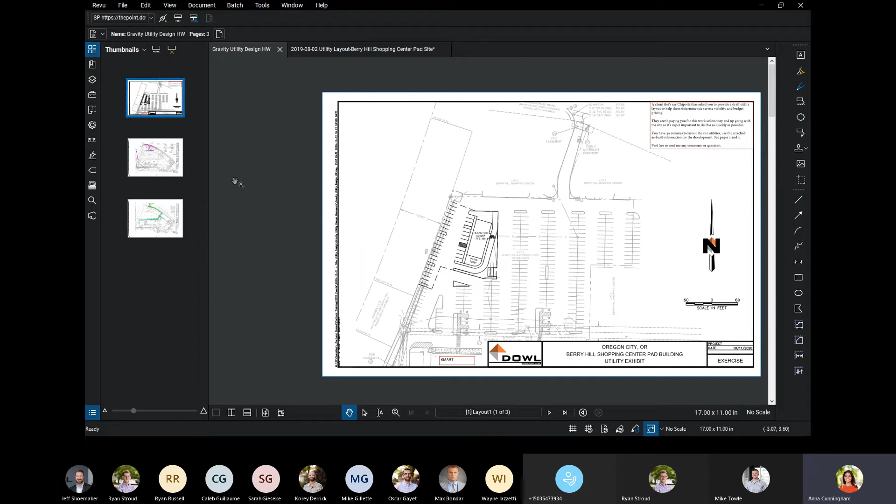In this case, I'll actually pull this up because I think some people might not have had a chance to look at it. So essentially we have this pad site. To the south is a Kmart, and we have as-builts for the Kmart project. This is that same road, so we know these are the storm pipes, and then we know we have sanitary and water.

But then the question becomes, where do you lay this stuff out? So back to the questions - is there city mapping? Sometimes when you're going completely blind in these scenarios, you don't have survey, you don't have as-builts - can you go on Portland Maps or whichever city's GIS system and try to pull that data, or at least be able to draft it in based on an aerial?

And then the last question, and I think Oscar you kind of started getting to that - actually I think there's one more: what does the tenant need? What is the use? If it's a restaurant, is that going to need something different than an industrial building? And the industrial building often has loading docks. So just those questions of what do we need to consider as far as sanitary, storm, water.

Although water's not a gravity utility, but anyway. And then what do restaurants typically need - loading docks? What does the future use require? That's one thing too, like for example the Portland Meadows jobs, they always have a provision for future use. They have this spec industrial building, and they'll say, well, we actually want to be able to provide sanitary to all four corners of the building, which is typical, but they're a bit more intense about it, because what if someday every corner develops an office? So it's good to know those things, but sometimes we don't know them from day one.

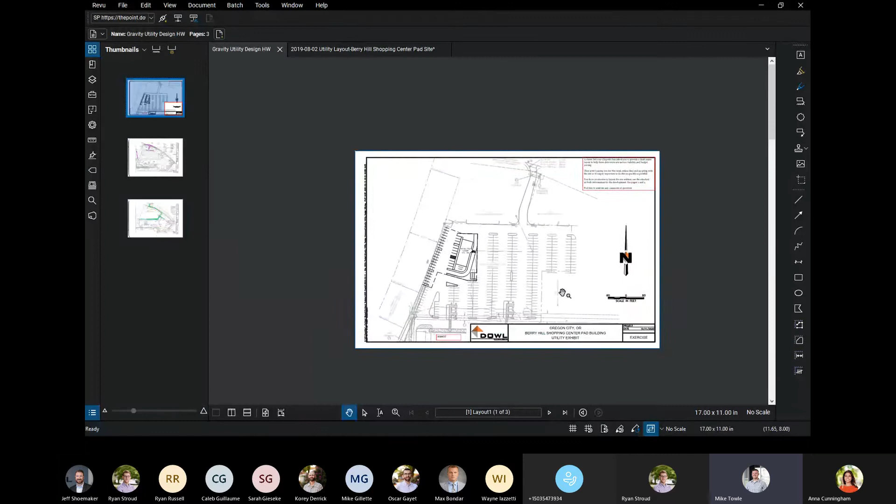I just wanted to, real quick before we jump into this, go over a little bit about the conceptual plan. Anna, if you were going to go back to those, feel free to stop me. A couple things, I don't know that we necessarily went over anyone's actual layouts, but in this case we had some existing contours.

Any thoughts on, if you don't have contours, what impact does that have on our potential conceptual utility layout? If we've got a site where we know we've got sewer and storm, we were able to find some GIS maps that show location but not necessarily grade. One of the things we need to be looking at is figuring out high points and low points on the site, not catch basin locations or things like that, but the general flow of the site.

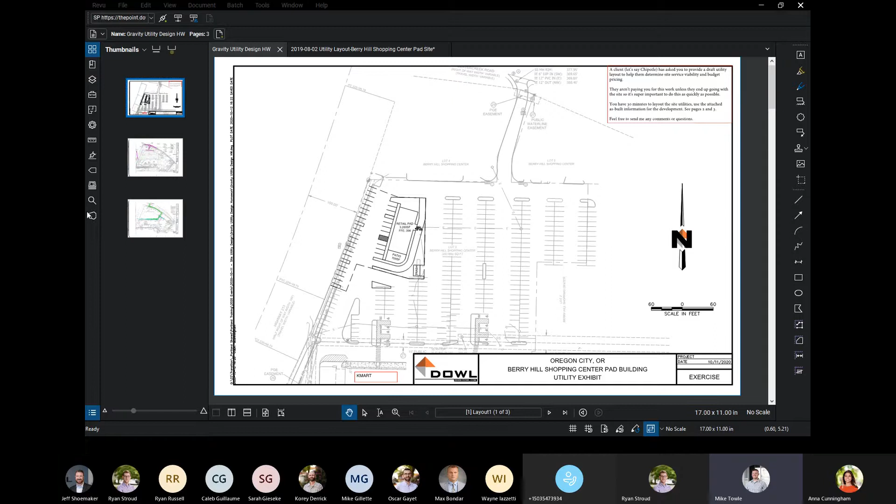There was storm and sewer on this site. If you look at those as-built, that was probably closer than where you potentially found, depending on how detailed you got, to where we may have ended up tying in. And if you don't do a preliminary look at, even just Google Earth, the flow direction of the site, we could be showing something that is likely not feasible because of depth of utilities.

Especially if we don't know the depth of existing sewer or storm - water doesn't really matter because it's not gravity - but if we don't know the depth of sewer and storm, we need to do some background on where the sewer is likely deep enough, or where the storm is likely deep enough. And if we're providing a conceptual utility plan to a client, if we don't know that information, we need to point out where it's coming from or what our assumptions were.

Because what we don't want to do is give them something, they take it as working, and then we get survey and we're not even close - that we have to run a sewer line 400 feet down the street to get depth on our line, or something like that. So we need to be making good assumptions on where we think the depth of sewer is, where the natural drainage pattern is, and whether it's likely we're going to have depth to actually tie in.

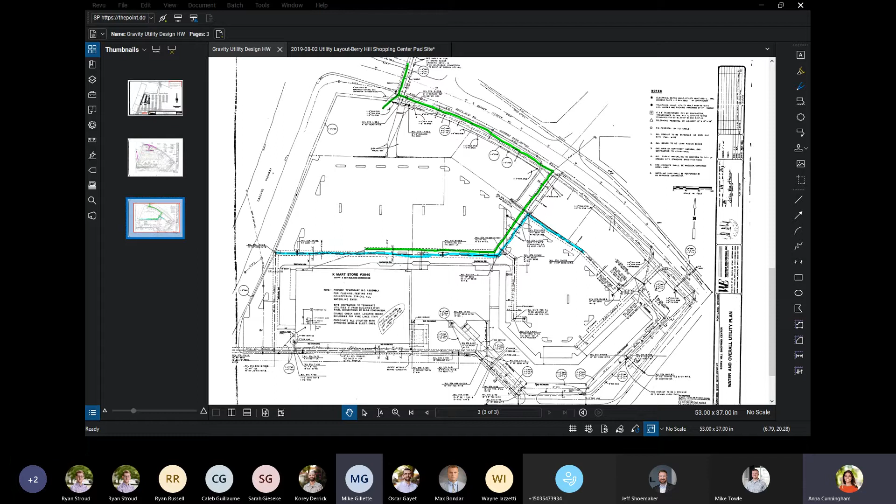Well, actually, I think Mike stopped me at a good point, because before I dive too far into what we should be doing, let's see what people did from the beginning. I saw Mike doing the homework. Mike Gillette, I'm going to put you on the spot. Do you want to go over your homework? I can bring it up and you can walk through your thoughts of how you set things. Is that okay? Yeah, okay.

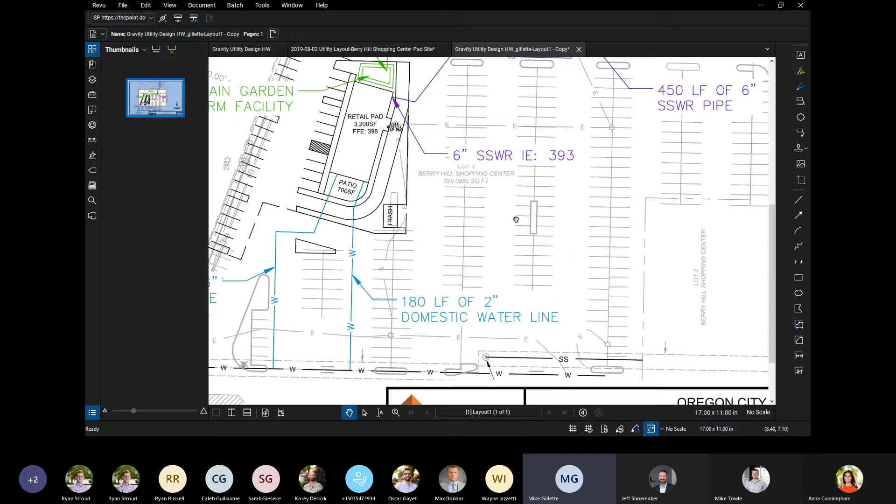So I started by looking first at where the storm and sanitary connections would be. The first one I looked at was closer to the site on the south, but quickly realized we had a finished floor on the building, and I remember that sanitary line was basically right at finished floor, so it wasn't a good candidate for tying into. So then I saw on the north side that one is like 30 feet lower, so figured that's where my sanitary connection would go.

Then the next thing was looking at those storm catch basins there, and there wasn't any line work on them, but they had the elevations listed on the side there. So basically I confirmed on the storm network what that elevation was, and just did a rough check of where that crossing would be for the sanitary.

And then I looked at the storm connection to our building, and also using the as-built, you could see from the existing grades that the whole site kind of just sheds north and then goes down the hill, down that road to Beaver Creek Road. So I just threw a little rain garden facility, drew it in on the low side of the building, and then had my storm pipe out and connected to that line in the access road there.

I said to throw a new manhole into that connection, and everything kind of just sheds way off to the north, so I'm not too concerned about crossing conflicts, since it's not a huge site and we have a lot of grade to work with.

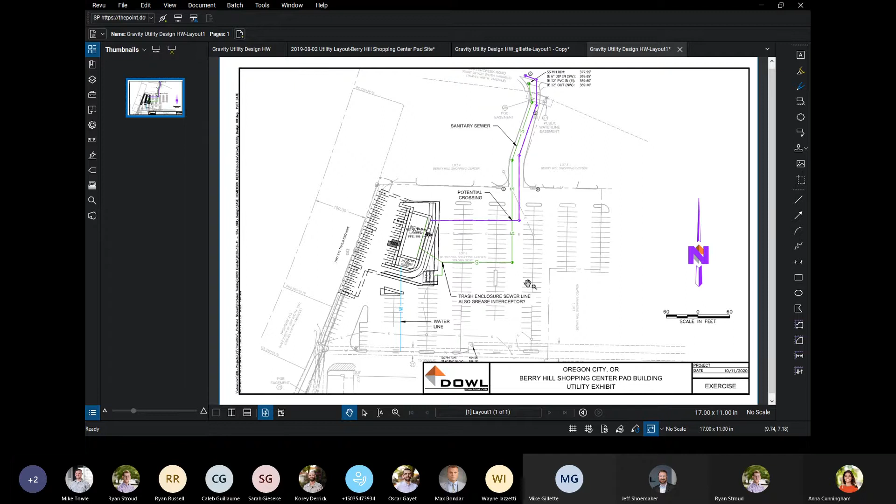And then for the storm, I looked at where the storm was and looked at the catch basins, and I just mocked in a rough version of where I thought it would be.

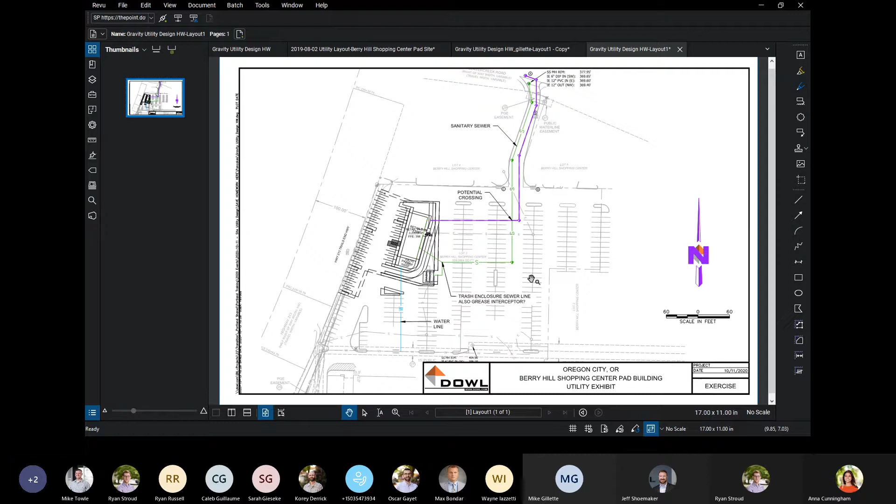I crossed there, but I didn't really know exactly where we wanted to connect. I was moving fast through this, so I didn't check all the stuff and make the calculations. Probably in retrospect that's usually a better idea, but I was just trying to get a fast layout that was decent and showed something.

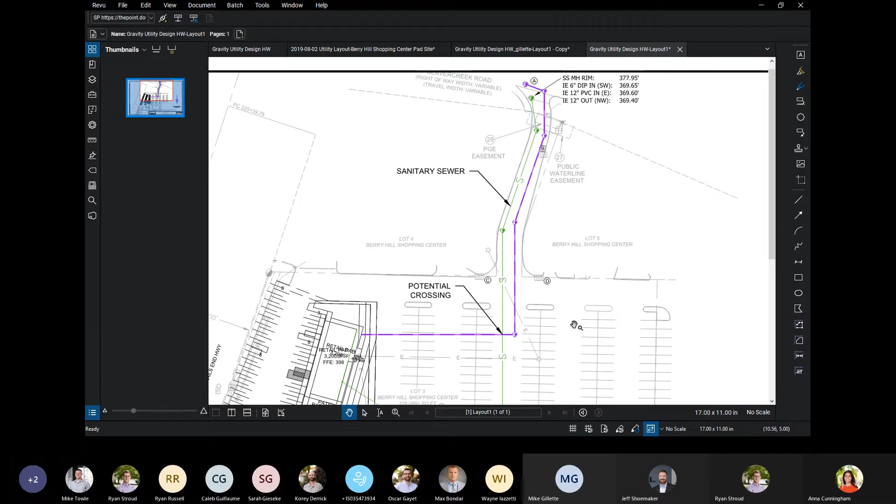And of course I mislabeled stuff. Actually no, I labeled stuff right. The reason I knew we were connecting up here is because the elevations were below the finished floor, and I know we're draining to the north on this site, at least with our gravity-based storm network. So I mocked those in there.

And then I knew we needed water, and I didn't want to have that undone, so I just threw a water line going in from that public water easement and into that thing. I didn't really look a lot about placement with all the stuff in the parking lot - that's where I probably could have done better, but I was trying to mock up something quickly so we could show something. Does that make sense to everyone?

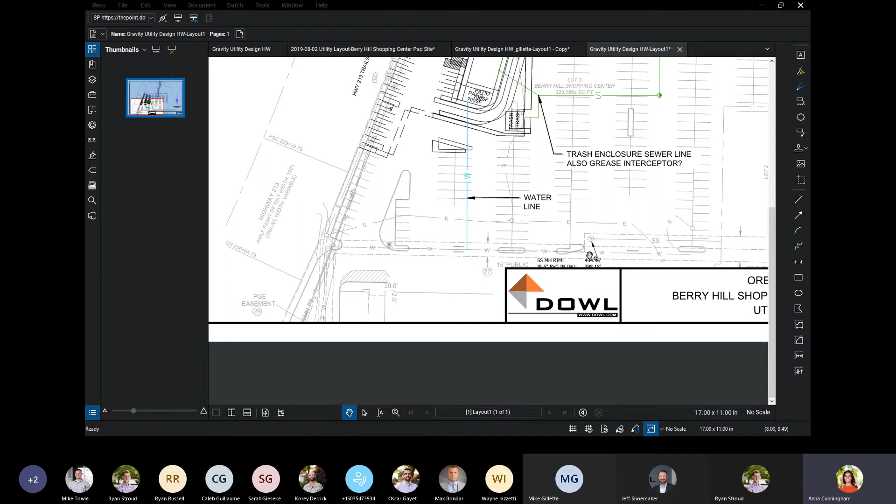I think it was good to think about the grease interceptor - that was one of our talking points for this. And I think the storm treatment was a really good add as well, just because where your site's going to be plays into where you put all your other things.

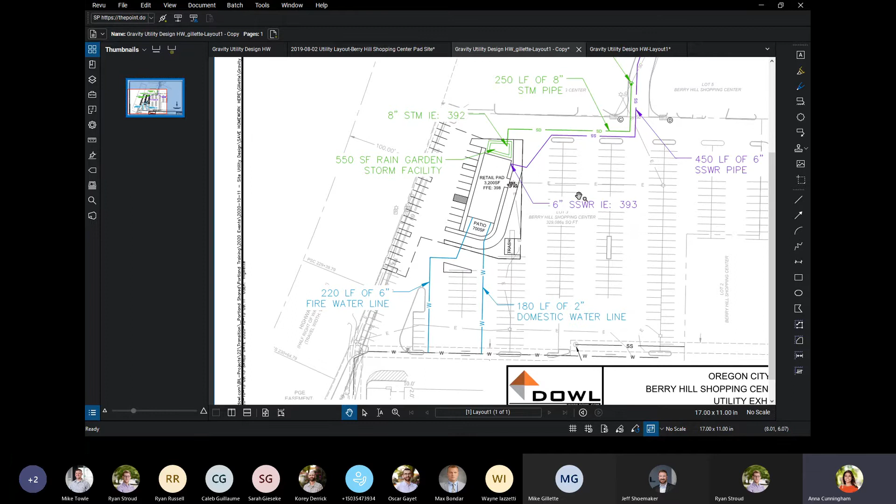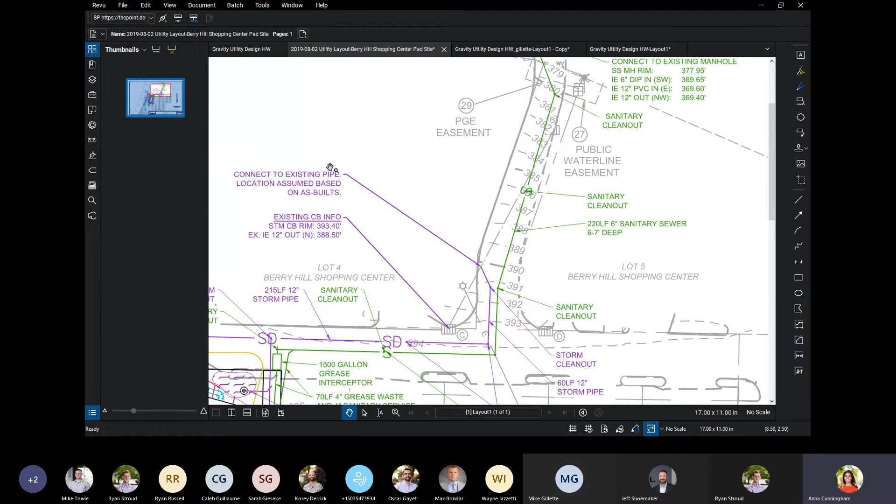One of the things I wanted to touch on with this layout - here's what the final looked like. It's a little busier, but this is what Mike showed where he made the assumption that there's a pipe here. This is kind of what Mike or Jeff talked about, that we need to make sure we clarify what we're assuming. So we're saying we're connecting to this existing pipe, but the location is assumed based on as-builts. And then storm pipe coming here - we just threw in some catch basins and some treatment areas.

And then for the sanitary, I guess the first question, and this goes to what we're going to go through in the PowerPoint, is how do you set your invert out of the building for sanitary? Anybody want to answer that one?

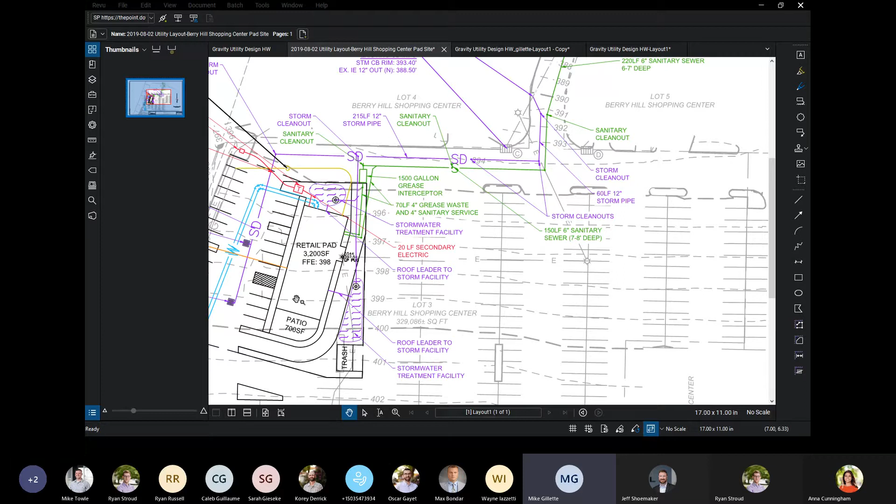Rule of thumb - I just set mine 5 feet below the finished floor. Is that just a frost depth calculation, or generally what we end up doing? I think that's what I saw on a recent project, and I've also been told at one point that it comes out from the slab like 3 feet down or so. Maybe 6 feet is probably where you want to be, generally speaking. If you have a bigger building you might want to do some calcs on lay lengths, but 6 feet for a quick estimate is pretty solid.

So what Korey's talking about with the lay lengths for sanitary sewer - we typically, I don't know if it's 2% or 1%, but I think 2% is more conservative, especially in a smaller building with smaller pipe, they need to run per plumbing code 2% across the building. So what I'm saying is you measure the building, get from the furthest corner to where you're going to be serving it, run that distance and multiply it by the slope of the pipe to get the minimum amount, and then you have to drop it. I usually drop it 1.5 or 2 to account for a floor drain and it running all the way across the building. Is that how you guys would typically do that?

I would always account for 2%. Bingo - building plumbers do not like going under 2% when they're dealing with their design. So always assume 2%, and like Anna said, from your tie-in, go straight to the back wall and then over to the furthest point on the building, and that will generally get you a depth that you know at any point on the building that they can tie into.

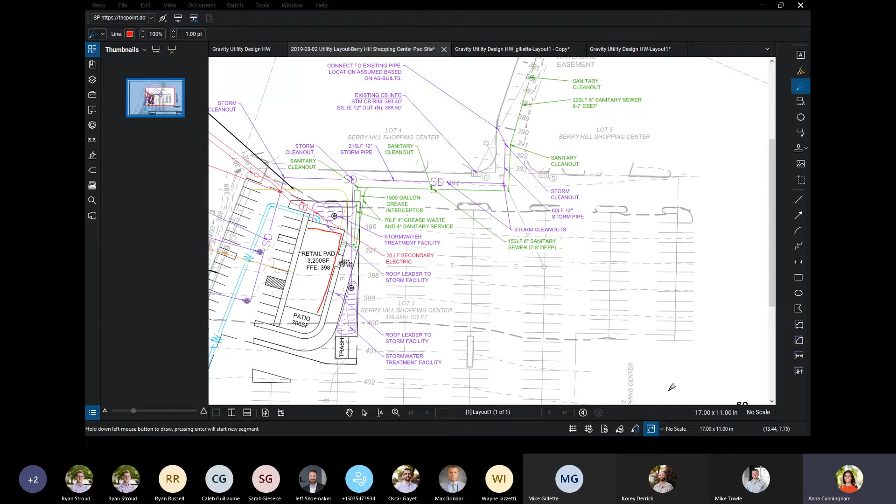So I'll hop over back to the PowerPoint and we can kind of go through. We talked about invert at the building.

Another thing that's interesting - I don't know that they're necessarily different, because now talking to Mike I feel like I'm all wrong about what I know - but matching inverts, matching spring line, or the center line of the pipe. Typically in a manhole for sanitary sewer, we're going to have a drop. The thing that throws me off a little about sanitary, or something I don't think about a lot, is matching crowns, because we don't often upsize in sanitary sewer. We're usually just running one size the whole way.

But then one of the notes is that when we connect, Mike does this typical note on his sheets, but when we connect to a main line and we use a saddle, the question to you is: where do we match when we use a saddle? Anybody want to answer that one for sanitary sewer?

It's only 3 choices. We have crown, we have spring line or center line, and we have invert. Spring line - nice, great job.

So then another question, and this kind of varies by location, is when are drop manholes required in your guys' experience? When have you seen them? Anybody? I don't know what a drop manhole is.

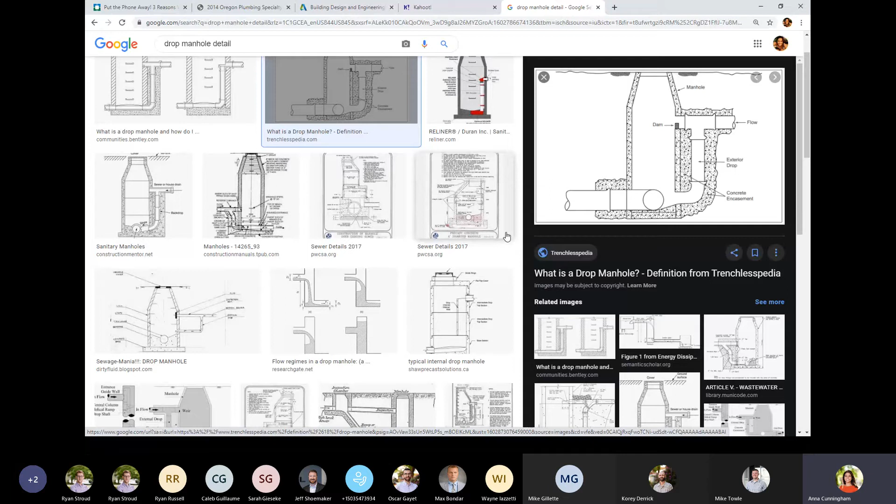Does somebody want to walk through this? I don't think I'm going to explain this well. Anybody? Korey, do you want to explain drop manholes? I don't think I can actually explain it. I just know you need them if you drop more than 2 feet.

Well, the idea - and I could be wrong on this - I believe the idea is simply that if you ever need to go maintain these, you don't want to be in there with sanitary 3, 4, 5 feet above the invert. So you're better off having some sort of structure on the inside or outside that drops that invert down and ties in at what it should be. You also get less splash and that type of effect.

Nice, I think that - hey Anna. Yeah, it's Max. My understanding of the drop manhole is if you have stuff dropping from a distance, say 4 feet, it actually starts to pile up and creates a barrier to the flow. So if it's solids, that's why you want to keep it flowing in a straight line rather than letting it pile up and create a clog. So I think that was the explanation I've heard about drop manholes.

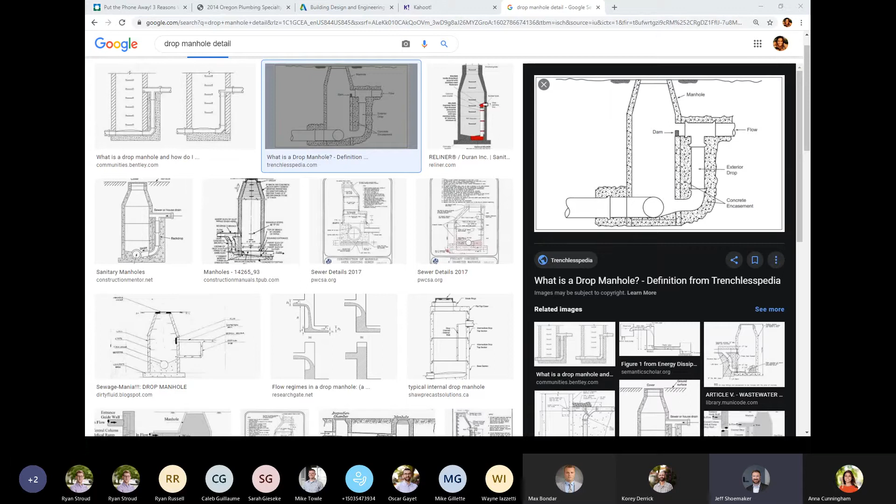I'll agree with that too. Both of those are right. And I'm curious if anybody - I'm looking at these details - I've never done an external drop. I've only done the internal. Yeah, it's interesting, I had never even - I've only done the internal.

So the thing you need to keep in mind if you're doing an internal is that it might require you to upsize the manhole from 48 to a 60. Okay, yeah, cool, the other thing - learned something.

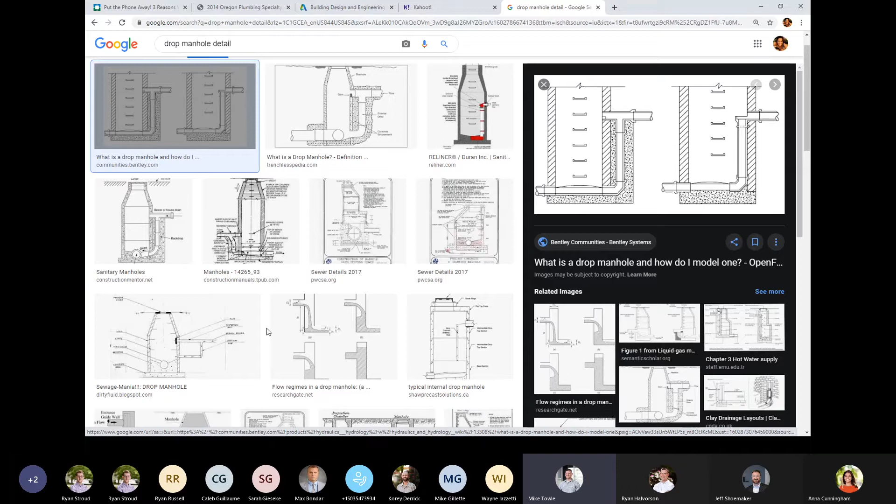One thing too, guys, is that on an exterior drop, a lot of jurisdictions are not allowing that now, or it takes approval to do that. I've run into that a couple of times here where the thought was to do an exterior, but we ended up doing an interior. Okay, cool.

So how about grease interceptors? I think Cakes talked about the grease interceptor on the exhibit. Since it's a restaurant, the waste from the kitchen area is obviously going to have more grease. So you need, pretty much they're always required for restaurants, a grease interceptor for a separate grease line that comes out of the building and then joins up with the main line that ties into the system. And then you have a separate waste out for the actual sanitary service for your toilets and stuff.

So as far as grease interceptor sizing, how in the past have you guys sized grease interceptors? Typically, this is Max. Typically, you get a letter from whatever business, say Chipotle or Starbucks, and usually they'll specify the size that they require, whether it's internal or external. Yeah, that's usually what I look forward to.

Cool, Cakes, I see your hands raised. So what I'll do is, depending on what information you're given, sometimes you're given that they specify which one you're supposed to use. Other times you can go on the Oldcastle Vault site, a good resource, and look at your fixture counts, and you can calculate a grease interceptor size based on the number of fixtures in the kitchen and restroom. They'll approximate the size you probably want. That's usually a pretty reliable way if you don't have information where you're already specified one, so you can get a size for which one you're supposed to do. Does that make sense? I'm gonna put my hand down.

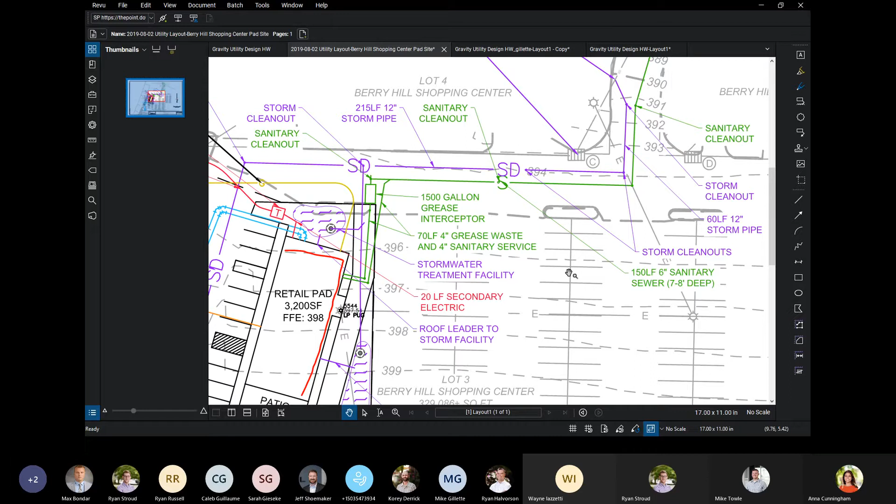Even if they're vented, they tend to smell. Some clients want them in landscape because you can hide them a little better, so you don't have the 3 manhole lids sticking up at the surface. But generally I'll try to put them out in the parking lot, in a parking stall or something, further away from the front door. But you just want to pay attention to the depth of them as you get further away. And the further you put them away from the building, the more parallel sewer piping you're going to have with a separate grease and waste line.

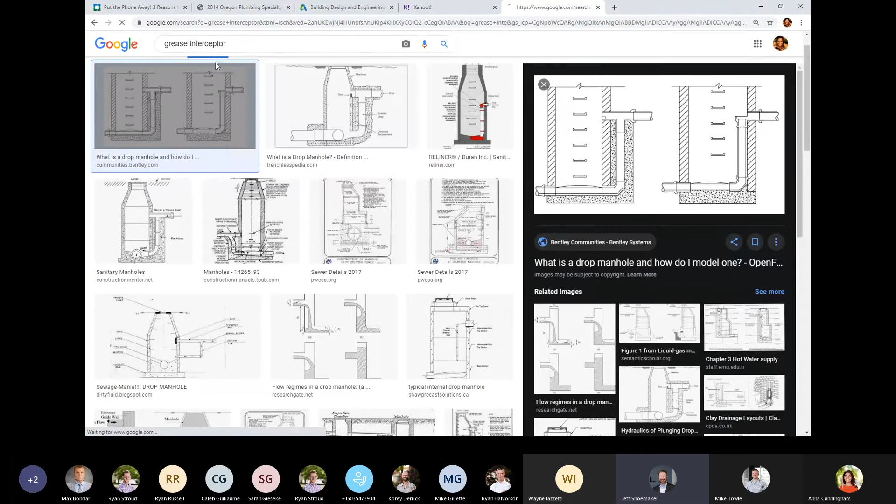Generally, if you can, you want that to vent, probably back into the main stack of the building. So the closer you are, the better off you are. In addition, you can only extend the risers on the manhole lids so far. So the further you get away from the building, the deeper it goes, which means you need a vault extension rather than just extending your manholes. And that's for potential - CWS is really particular about that one. So just think about the serviceability of each one of these types of things, and get as close to the building as you can without disrupting drive aisles. This would apply to grease interceptors or oil water separators, which are kind of in the same boat.

Yeah, that was the next item on the list. I just wanted to pull this up so people understand what we're talking about when we say grease interceptor - it's just this vault, more or less, something like this. And for the vault extension, the top slab has to be higher up. So is it part of the box that is added on? Is that how it works, like you just have to extend, or is there an additional piece? There's a couple ways they can do it. You can get ring extensions for the vault itself, or they can cast the top slab with a deeper side panel.

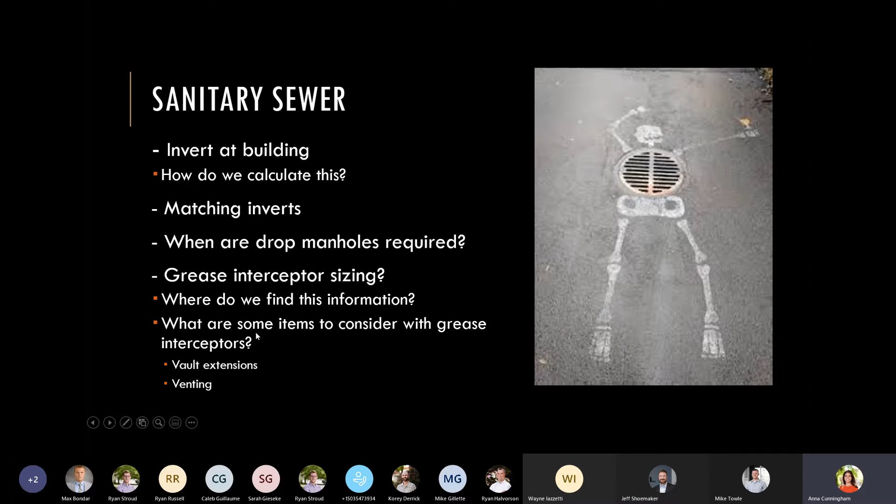So some of the items we talked about are the vault extension and venting, which Jeff talked about as well - the closer you are to the building, the better for both of those items. Okay, so sewer sizing - how do we typically go about sizing the sanitary sewer if we're not provided that from somebody?

Do you want me to tell you? I can tell you.

This is one that can vary depending on where you are, but in our case in Oregon, there is the Oregon Plumbing Code. If you haven't gone to the Oregon Plumbing Code before, you can just Google it. I think this one might be the 2014 version. There's maybe a more recent one, but it's always hard to flip through and it makes noises when I change the page, so I picked this one.

It essentially goes through a list of fixture units for each of these different plumbing uses. This is something we typically were given the size for from the MEP a lot of the times, but sometimes, especially when you're doing just a quick calculation, you want to run through and make an estimate of how many there will need to be. There's fixture units based on whether it's private or public, and based on those fixture units, there's a minimum pipe size and maximum loading. So for the drainage piping, the maximum fixture units for a 4-inch pipe is 256. That's typically the way I would go about it. Does anybody have any other ways that they would size this?

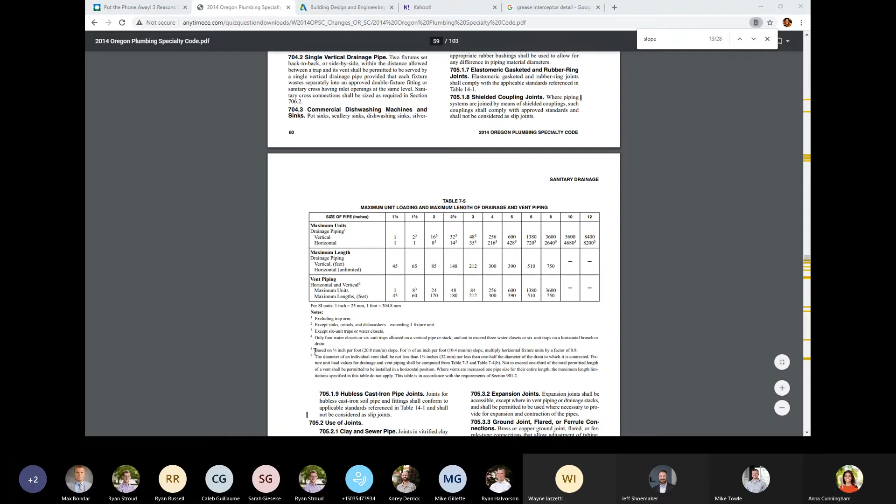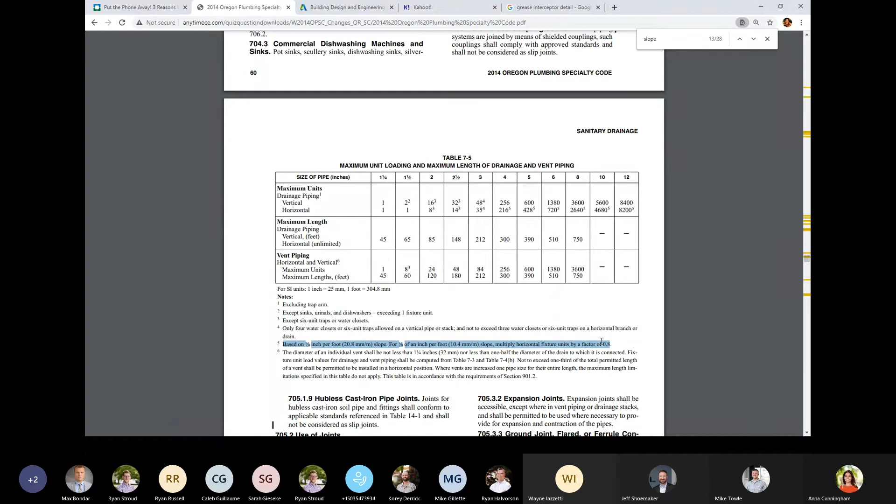Just something to point out, that table is based on a 2% slope. We occasionally go less when we're outside the building, and there's a 0.8 factor - I think that's footnote 5, if I'm reading that number right. Footnote 5 would require a reduction of your allowable fixture units and unit loading - a 20% reduction. So keep that in mind.

The other thing to keep in mind is a lot of jurisdictions have a requirement for commercial projects that your stub into the city system has to be a minimum of 6 inches, regardless of if your unit counts show that a 4-inch works. Is that a Portland requirement? I know it's Beaverton - do you know if it's Portland too? I think 6 inches is minimum for commercial in Portland.

So this is a quiz question, if anybody would like to answer: when would a sanitary sewer check valve be required on a sanitary sewer line? This is per plumbing code too, so if you've been studying this late at night in your free time, you might know. Reading plumbing code before bed instead of on your phone. Exactly, that's the moral of the story here. Yeah, there you go - it's required when the plumber tells you.

No, good job Korey, this comes up all the time actually, and plumbers are much more aware of it than we are. It's when the upstream manhole - let me get this right - I believe the upstream manhole is higher than the lowest point in your building. Is that right, Mike? Yeah, it's the upstream public or private manhole on your connection. So if you've got a building connection that ties into a main line, if that next upstream manhole rim is higher than your lowest finished floor, you need to have a check valve on your sewer lateral.

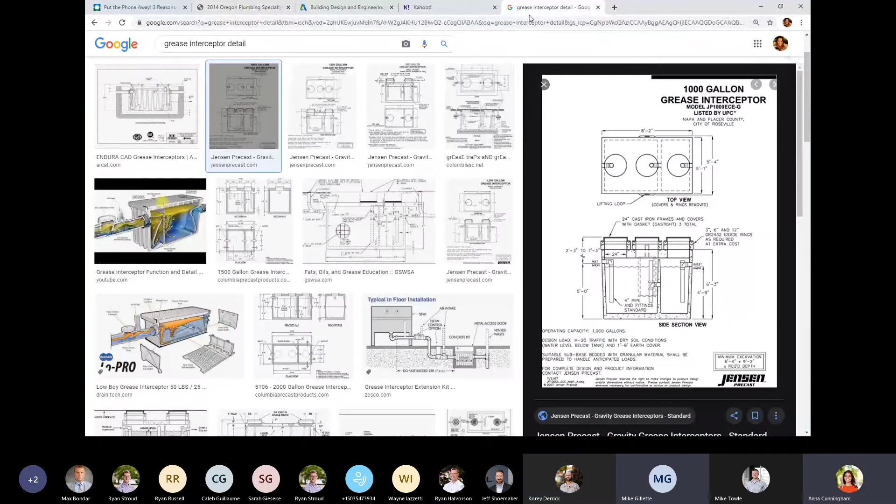It basically allows flow out and does not allow flow in. Oh yeah, it's so you're not flooding your building with sanitary water, right? Exactly, so it's so that if the city line is flooding, it can't flow back up into your building. If the city line surcharges, then yours would surcharge, but you don't want the city's coming back up into yours. And you get into that a lot with basements. That's why a lot of times the first thing the plumber is doing, he will ask you what the upstream manhole rim is of the sewer, because that's the first thing he's checking - whether he needs a check valve or not.

And is that check valve at the building? Sorry, Mike, or is it part of our line? Where does the check valve go?

I believe literally it is right outside of the building, but it's still within the 3 feet or the 5 feet. I've never called them out in terms of just like when I do the right of way, if the building's right of way tight. But I do think it's coming right outside the building. Mike, if you know, correct me.

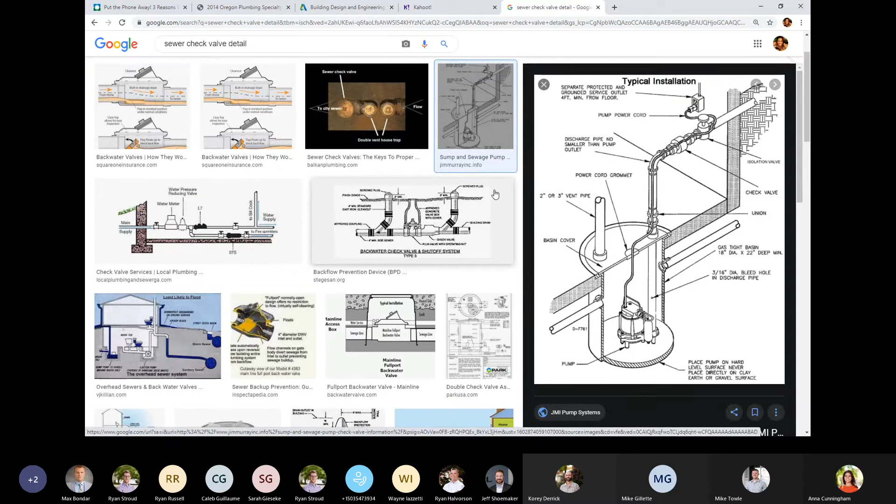Okay, it is not ideal on a waste line. I didn't see, I was looking for that other plan where we had actually had one called out. Did you find a check valve detail? It would look similar to the one we use for like a footing drain or a foundation drain for stormwater. I'm sure a lot of you have seen that detail, where it's got a flap valve inside of a T, so that when water starts flowing back, it pushes on that valve and shuts it.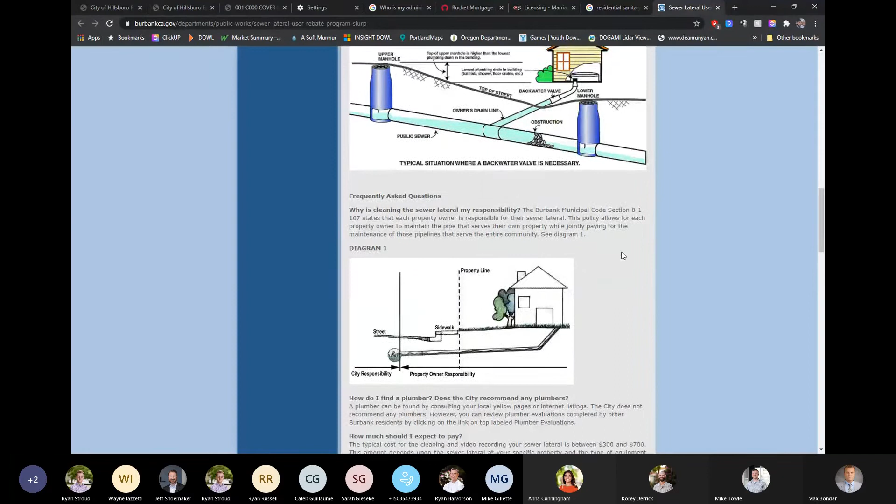In a sewer scenario, when you've got solids flowing through the pipe, they can start to get trapped on that flap valve, and they can cause issues in your sewer line. If things get plugged on that flapper valve inside the check valve, it can cause backups on the upstream side of it. So if you have to dig that up to maintain it, you don't want it to be inside the building. I believe by code they can be inside the building, but you don't ideally want them there, because if you ever have to dig it up to maintain or clean it, you don't want to have to dig up your floor.

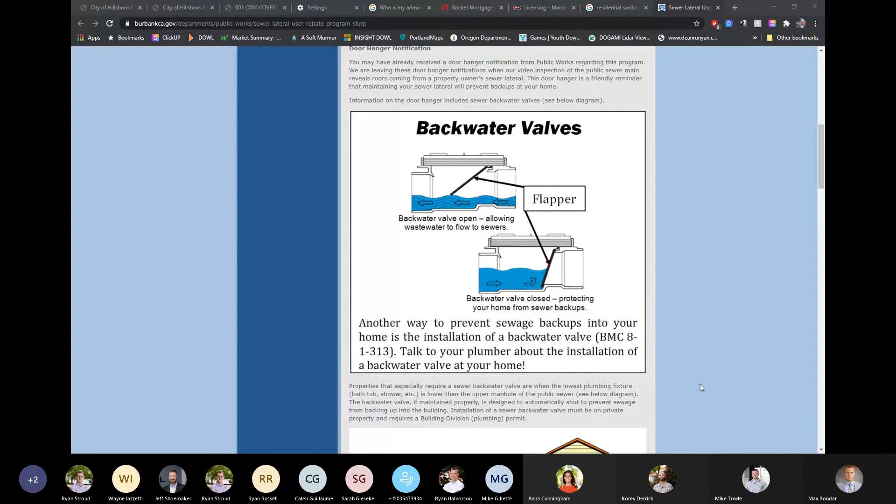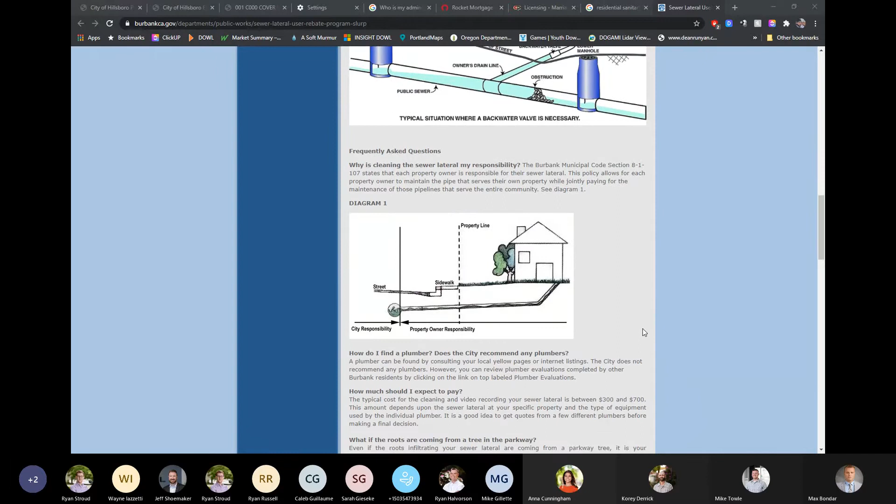All right, do you want me to share my screen now, Mike? I think you still are. Oh, I don't know who's sharing. Somebody else was, or maybe I am. It said my thing was done sharing because somebody else was sharing. Oh, I don't know who that was. It wasn't me. Oh well, whoever. Oh yeah, thank you, that was nice. Yeah, that was me, sorry.

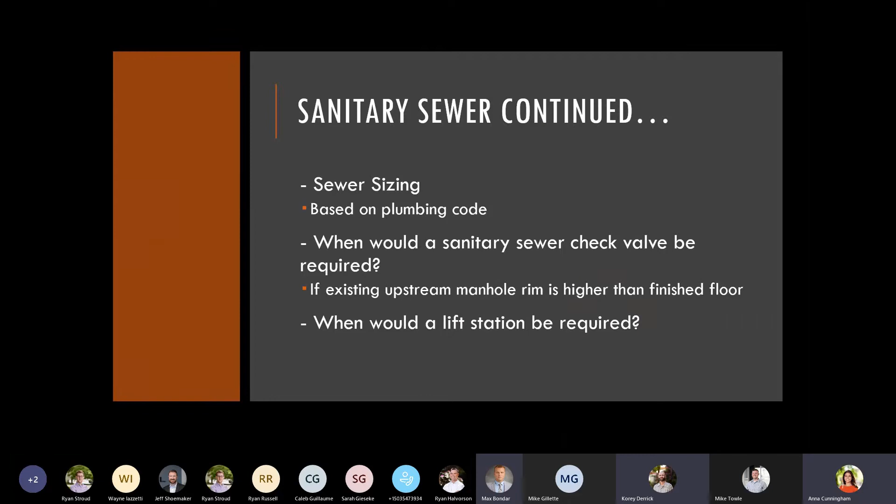When Mike was talking about flappers, I figured I'd give a visual representation of what a flapper is. Got it, so thanks, Max. Yeah, you're welcome, got you.

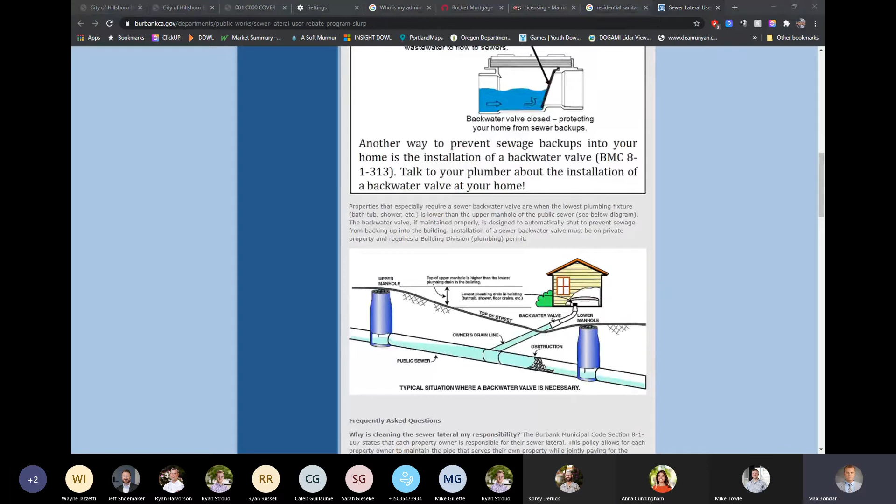Thanks, Max. Okay, so then when would a lift station be required? I might be confusing a lift station with a pump station, but I feel like I was on a project where the only way sanitary was able to connect to a public line was that at the low end of the site, they just had to basically pump it via, I guess, it's kind of like a pump within a manhole situation, and just forced it right back up into the public line.

So I don't know if I'm confusing the two, but no, that's exactly it, I think they're the same. For some reason I always think pump station is stormwater and lift station is sanitary, but I think they're interchangeable. That's exactly it. When you can't gravity flow from your building to wherever the available connection is, you have to pressurize the system, lift it up, and then force main out.

I don't know how much we want to go into lift stations because they are very involved. If you ever have a really huge lift station on your project, I can help, because I've had to work on like 5 of them at this point, and we usually outsource them to like the Romtec of the world. Yeah, just avoid them where you can. Yep, they're super expensive.

The ones on the Meadow sites, some of them are $400,000, some are close to $1 million. These are really big stormwater pump stations. The sanitary lift stations are pretty small, but yeah, they're very expensive and very annoying, and they require a ton of coordination as well. So just avoid them, that's the tip.

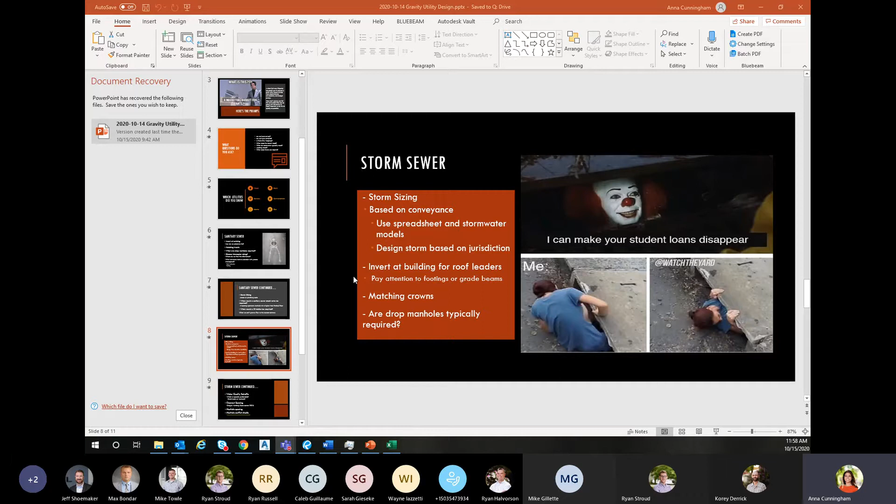And then, like we were talking about earlier, the drop manholes. I've never done one for storm, but apparently they do sometimes happen.

Okay, I'll go to this next one then, so that it doesn't slide. So this one I will let Mike talk about because he's kind of the pro on this: water quality retrofits.

Yeah, so it's kind of a question of when you're looking at an existing site where you're doing a redevelopment, and you've made your way through the city codes and got out of doing LID, which a lot of jurisdictions are pushing for now. But in some retrofit situations you don't have the depth, or the grades don't work, or you can't put landscape islands in the middle of a drive aisle, which is where all the drains are. So we need to retrofit with a filter.

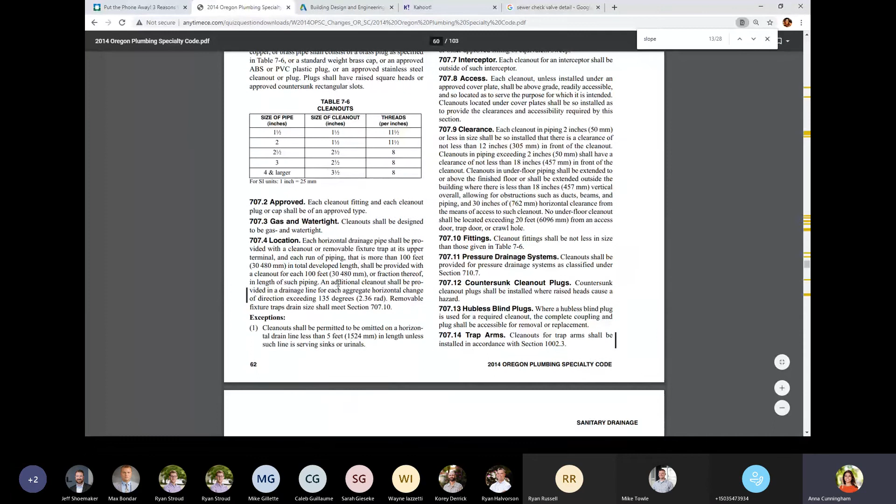Exactly, I think I learned that when I first moved here. So the plumbing code does talk about this - I think it was 707. Yep, cleanouts, location says more than 100 feet, provide one for every 100 feet. And just like you talked about, we want to be more conservative to provide some wiggle room for bends and things like that.

I guess more cleanouts - and then the eternal burning question I still don't think I've figured out is what the actual manhole spacing requirements are on a private site. I've got one more on cleanouts: regardless of length, you still need them every 135 degrees of bends. Oh, I didn't know that. Yeah, here, it says in a drainage line for each aggregate horizontal change exceeding 135 degrees - okay, so that's 3 45s.

Every 3 45s you need to have a clean out, even if that length is only 20 feet. So keep that in mind if you're laying them out.

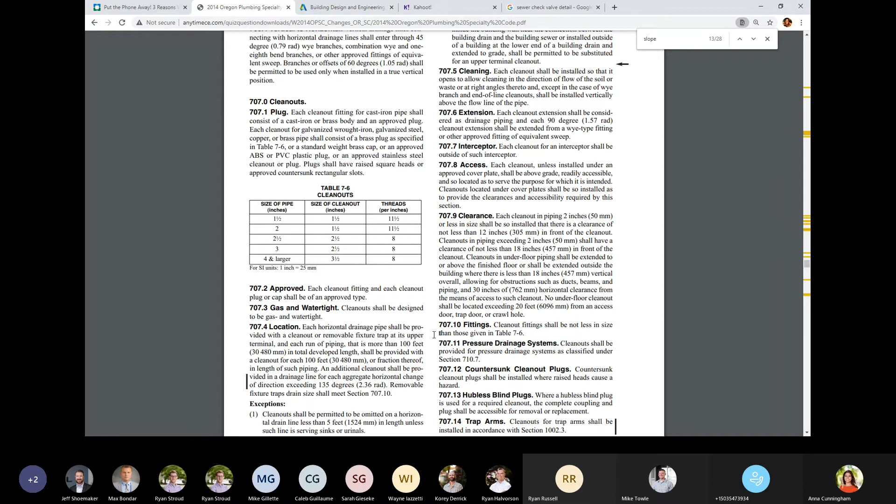And then I think I heard Korey mention, if you have really shallow storm lines - this generally doesn't happen on sewer because there's generally not sewer that's that shallow - but if you have really shallow storm lines where you're having to use potentially ductile or concrete pipe because of cover issues, you need to be very careful about where your cleanouts are located because they can't fit all of the bends of the cleanout. The cleanout is typically a Y fitting and then a 45 that brings it vertical. You can't fit all of those fittings in if your pipe is less than 2 feet deep.

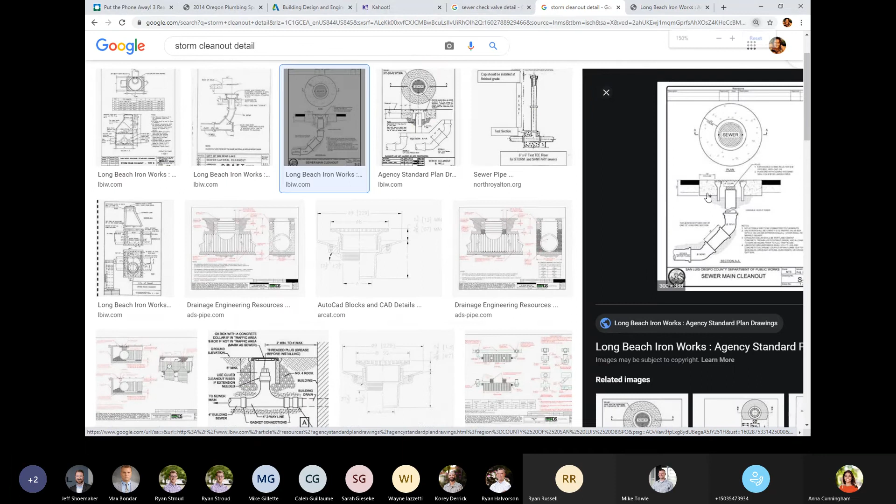There's just not enough physical space to get the fittings and the cap and the lid on it. So if you have really shallow pipes, you need to try and get them such that they're by the 90-foot mark or 100-foot mark, at least 2.5 feet deep.

So my manhole spacing question. I think this is maybe specific to big industrial sites where we're running long lengths of private pipe. When you're not, cleanouts make a lot more sense, but when you have bigger pipes and bigger sites, you will have manholes on private sites.

And I think plumbing code says one thing. What was it, Korey, that you said to run with? Was it 400 feet? Yeah, 400. So that's what we've been doing and no issues. I would like someone to answer that for me with some code section, but for now I think that's what we've always been doing, so I don't think it's a problem.

So the local jurisdiction will have a public standard in their design standards. If you're in Beaverton and Clean Water Services, they'll have a minimum and/or maximum length before you need a manhole. And public brings in a whole different set of rules, you can't have vertical grade breaks or horizontal grade breaks without a manhole. Whereas on private we don't have that issue, but if you are looking at manholes, a good starting spot might be the local jurisdiction public code.

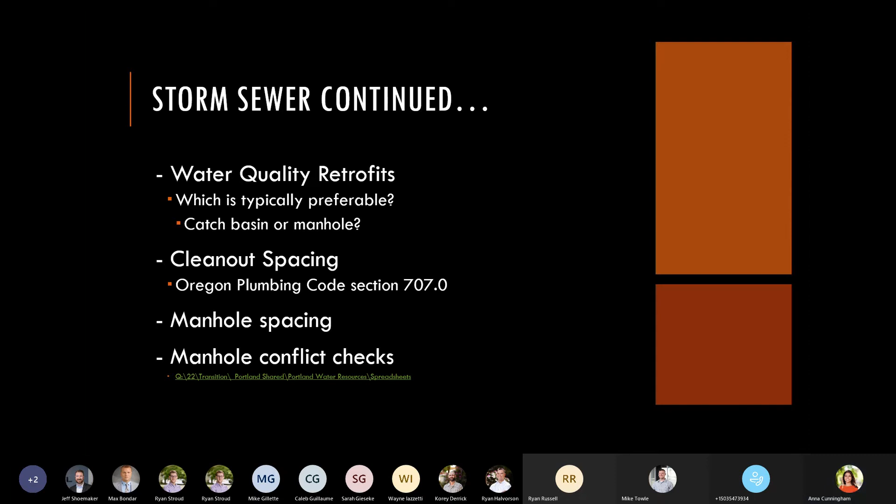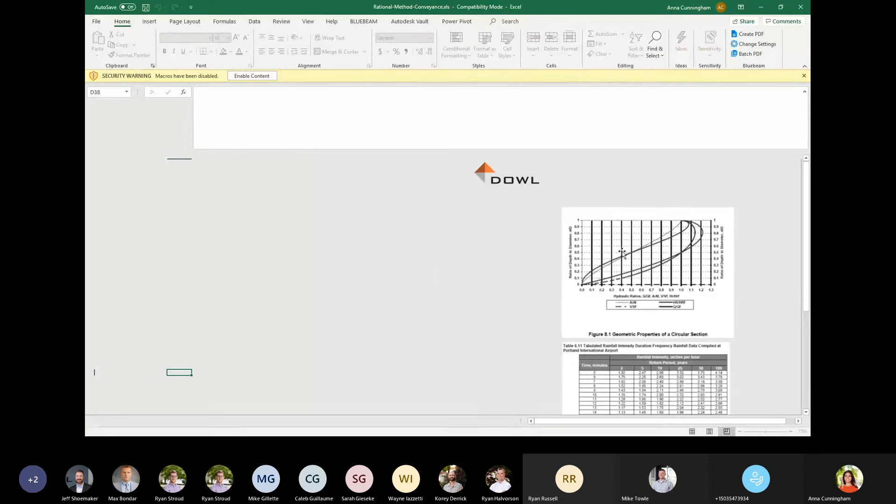Okay, anything else on manhole spacing, or are we good to go to the conflict checks, which I have another spreadsheet to show. I think the only other thing on manholes is just verify that you actually have the depth for a manhole, and that you've got enough manhole over the top of your pipes. If you've got really big diameter pipe and shallow manholes, you may need to call out a flat top, even though potentially your total manhole may be 7 feet deep. But if you've got a 4-foot diameter pipe, you won't have room for a 4-foot cone on top, so you may have to either call out a shallow cone or a flat top.

That's a good one. I hadn't ever spec'd a flat top manhole prior to working here, and I have now a few times. So that was a learning thing for me.

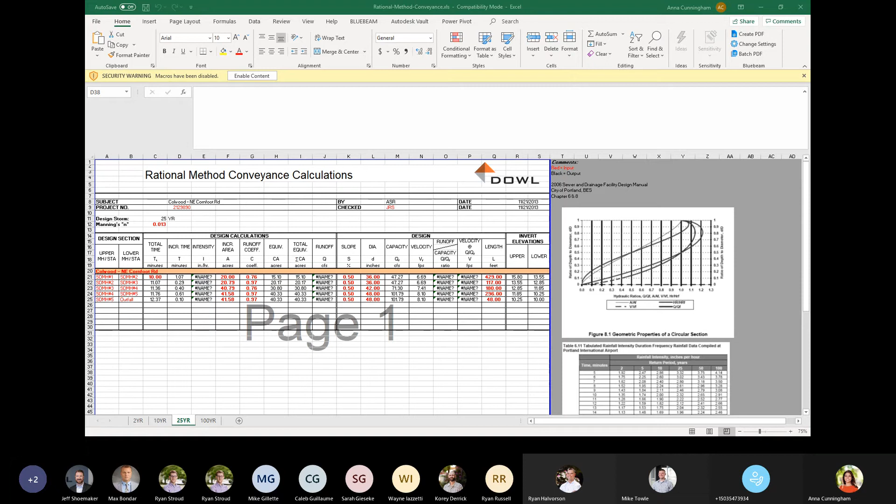Hey Anna, this is Ryan. So that question on the manholes, it actually, the code says 300 feet. It's in chapter 7 of the Oregon Plumbing Code, 719.6, but I will admit I have never seen this enforced. And Mike or Korey, have you guys seen this enforced? No, no.

Going with 400 then, it's a lot more. What I've typically seen is if the jurisdiction has like a 400-foot spacing on the public side, it seems like even the private inspectors know that spacing and they stick with it.

So anyways, I just wanted to bring that up in case you guys end up having a not so nice inspector. Garth. Who's Garth? Garth Bentley? Yep. Be a not so nice inspector. He's nice to me. Sometimes.

Okay, well I think this might be one of the last points, on the manhole conflicts. Yeah, so for storm and sanitary too, but I think less often for sanitary because we're not dealing with bigger size pipes. We have this manhole check spreadsheet, and I think Mike can explain it a little bit better, so just jump in if there's anything I'm saying incorrectly.

But essentially, you can select in this spreadsheet, which is in the spreadsheets water resources folder, the pipe size and material, and then it will input the core size for you. I hate that it does that. And then you put in the angle based on 0 being north, and I actually think it does say to do that.

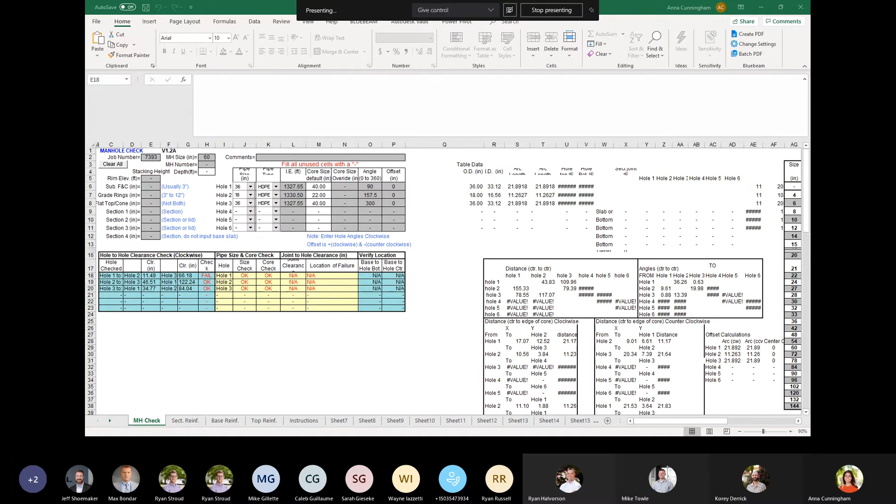Okay, so two final things to discuss: utility crossings, and I think I had a detail. Oh my goodness, I'm going to see if I can find it. Essentially for utility crossings, they're not the same when it's sanitary and storm versus when it's sanitary and water. Whenever you're crossing water, you have to provide these minimum separations. Let's see if I can bring this over.

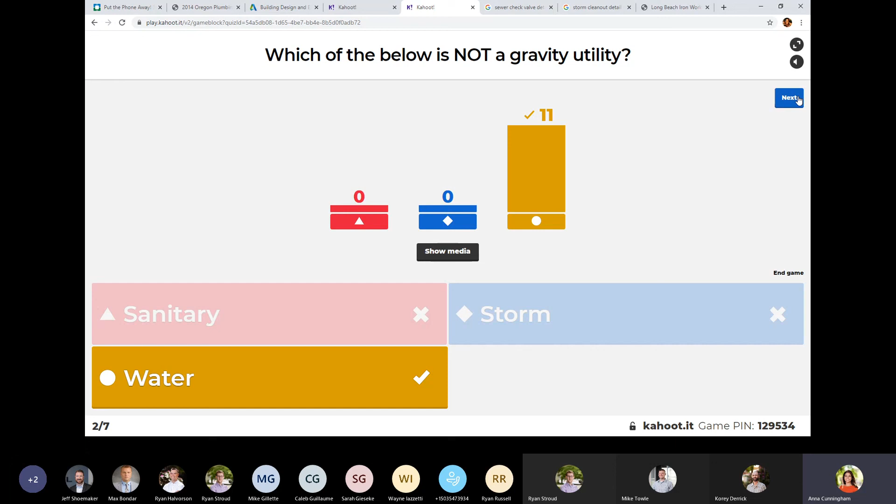Magic Ant, great job, very quick response. Which of the below is not a gravity utility? Wow, that was quick, good job. Next.

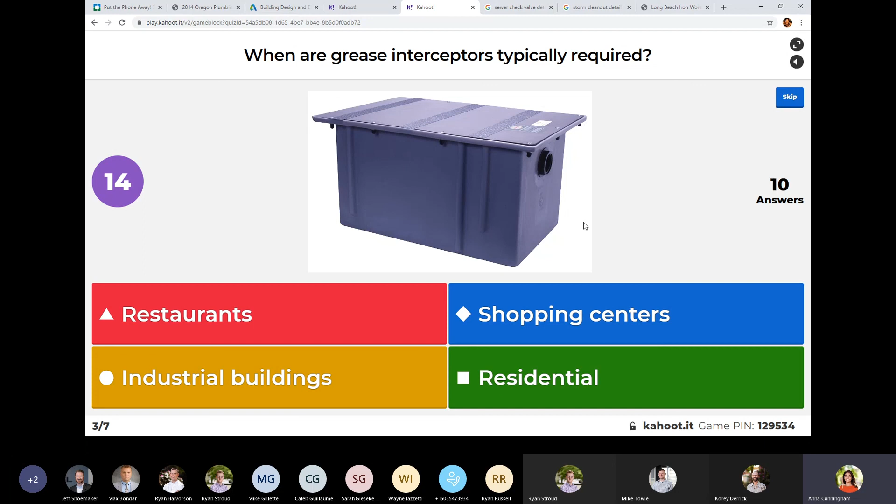When are grease interceptors typically required? And I say typically, just like the most common. Oh my goodness, you guys are so smart, you were listening, this is good. Who's in Magic Ant? Great job.

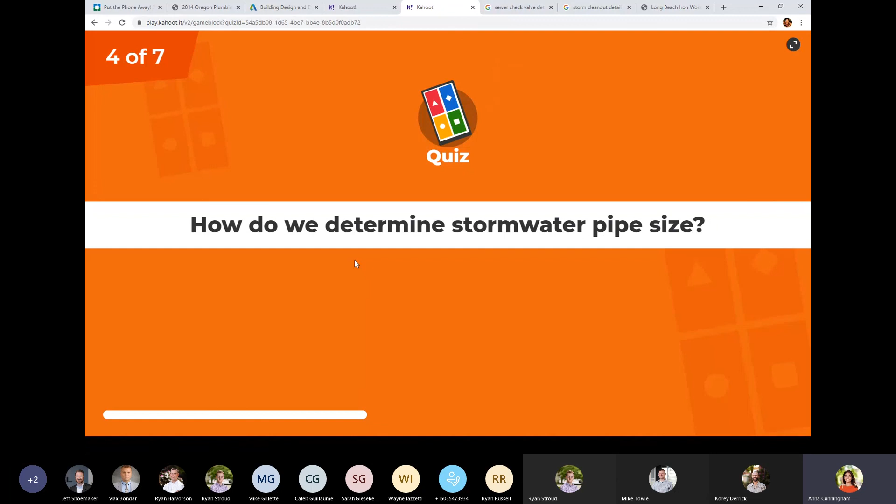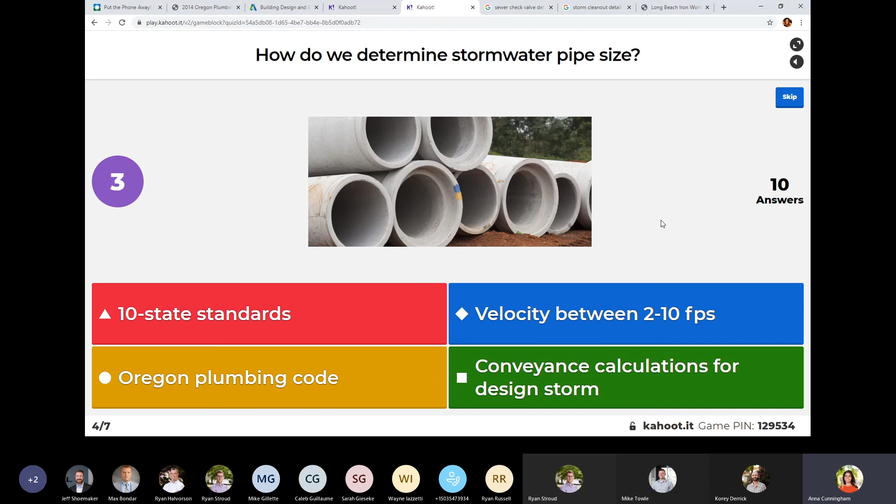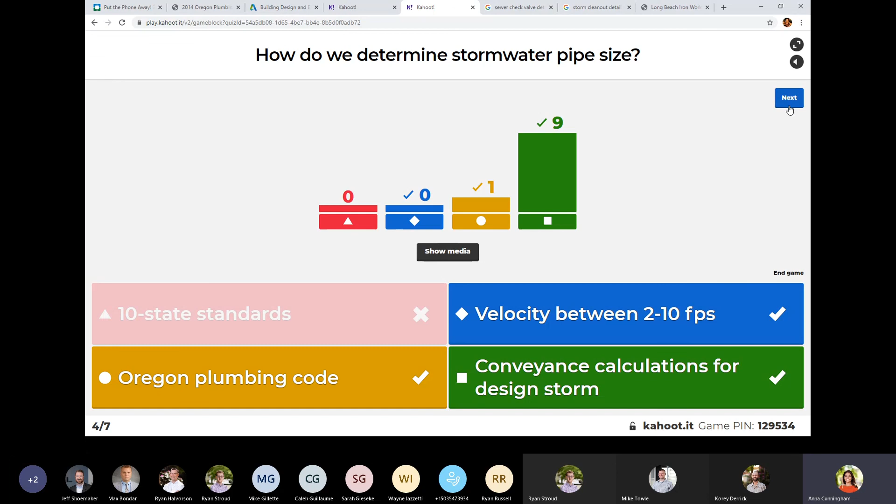How do we determine stormwater pipe size? This one is kind of a trick question because technically there's more than one right answer, but I didn't want to pay for the premium, so sorry. That's what I wanted the answer to be, but technically it can be these ones, this is what I was intending it to be. So you guys are reading minds, this is great. Wow, Magic Ant, I want to know who you are. Rockstar Ant, wow.

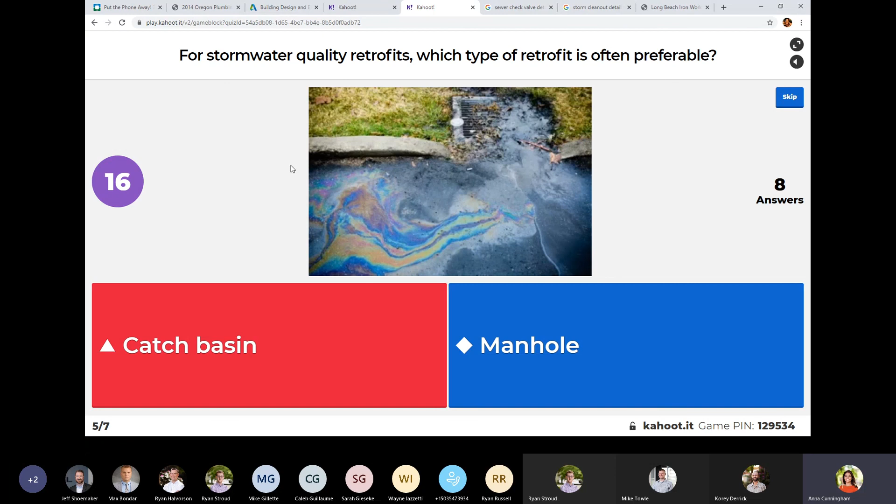Neck and neck. For stormwater quality retrofits, which type of retrofit is often preferable? 8 answers, let's see who was listening. Everybody was listening. All right, I think the Decisive Bison has the highest answer streak of 5. Wow, that means...

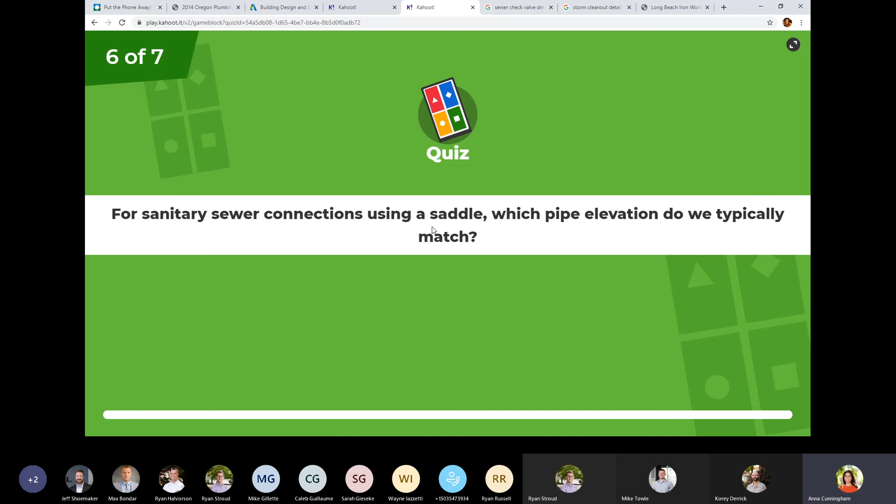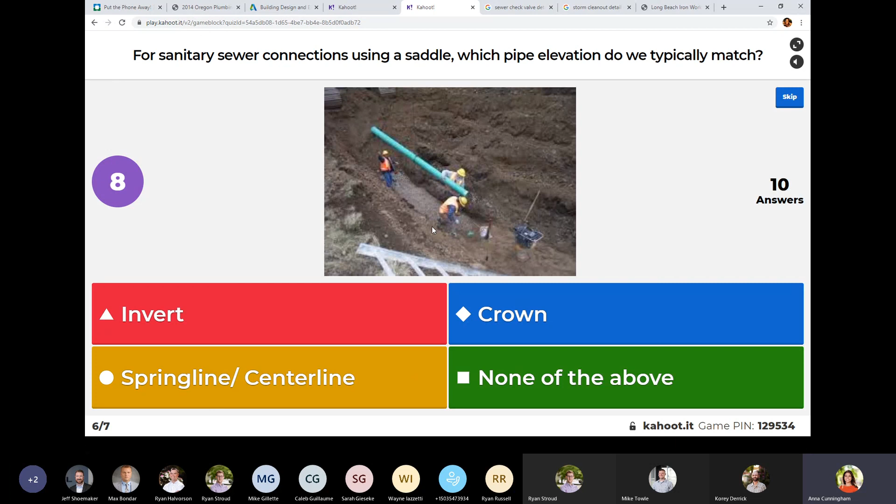For sanitary sewer connections using a saddle, which pipe elevation do we typically match? Maybe I made these too easy, I think I did, but that was kind of the point. Great job, springline for saddles. And wow, that's close.

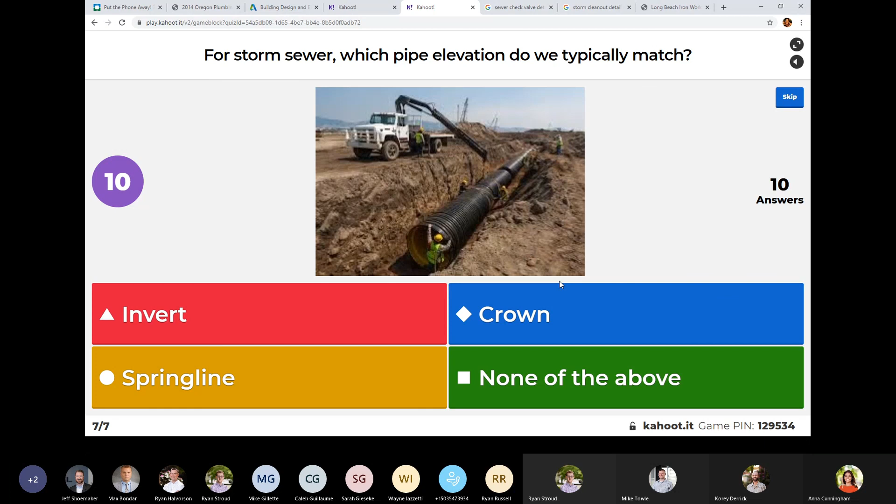Last answer. For storm sewer, which pipe elevation do we typically match? Good job, typically we match the crown. And that is all that I have for you in this round.

Oh, let's see who won. Jolly Seal, Decisive Bison, and the winner is Magic Ant. Magic Ant, would you like to reveal who you are? Who is it? I saw all these answers yesterday, so... It was you, Mike? Yeah. You're supposed to try half as hard, just kidding. Anyway, that's all I got for everybody today. I would have won if we would have picked Beetlejuice. Who's Decisive Bison? Is that you, Corey? No, I was Jolly Seal. Who's Decisive Bison? I'm Decisive Bison. Wow, great job Intern. Well, Mike just couldn't let him win first place though. Keep him in his place, show them who's boss, oh gosh.